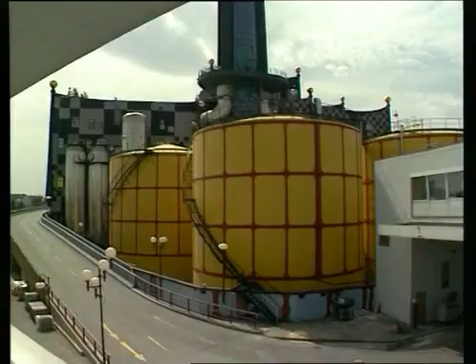Spittelau is, in fact, 2 plants in one, a waste incineration plant and a district heating plant. The plant is able to supply the Austrian network with altogether 460 megawatt of heat.

In the 2 waste incineration plants, Spittelau and Flötzersteig, more than 450,000 tons of household refuse are disposed of thermally for the purposes of environment protection. This is equivalent to 54% of all the waste of the city of Vienna.

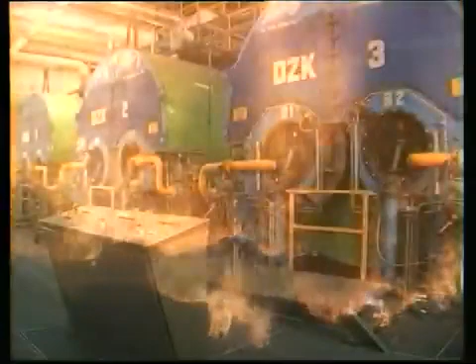About 60% thereof is burnt in Spittelau. During incineration, the waste delivers 60 megawatt of heat and, in addition, sufficient power to meet the needs of the plant itself. In the district heating plant using natural gas and special fuel oil, 400 megawatt of heat can be produced.

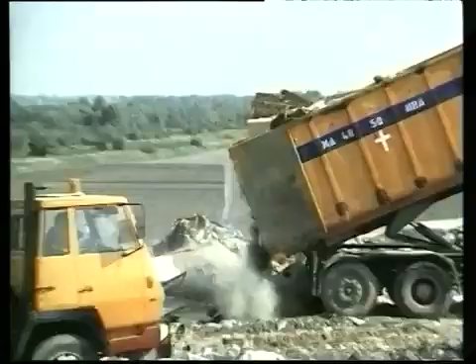The disposal of a city's waste is a problem. Space available in existing dumps is becoming scarce. If waste is dumped in untreated form, there is a risk of dangerous gases developing and of polluting underground water.

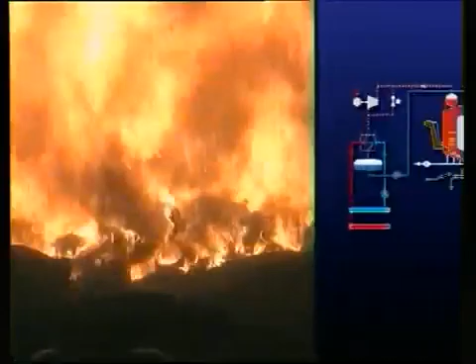Austria's new waste disposal law decrees that in future only a small proportion of refuse may be dumped untreated. One solution is controlled, precisely managed incineration in combination with optimum flue-gas cleaning, following which only few and chemically inert residues remain over.

The pressure is heavy. Up to 250 refuse collection vehicles have to be handled every day in the Spittelau plant. They arrive with up to 1,200 tons of household refuse. At 8 dumping points, these lorries empty the refuse into the storage pit.

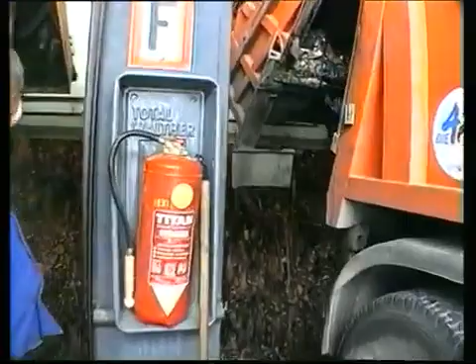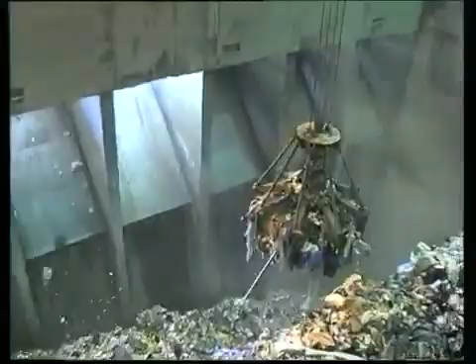The storage pit has a capacity of 7,000 cubic meters. It is the storage base for the Spittelau plant because the furnaces are in operation around the clock. Waste incineration is carried out in 3-shift operation.

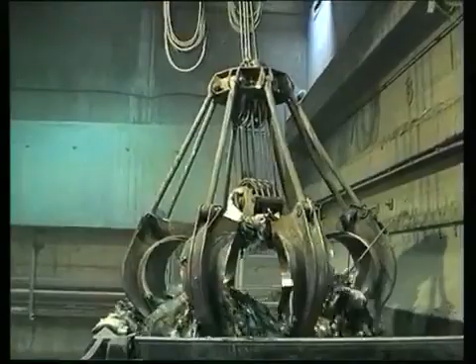2 gantry cranes, each fitted with a 4 cubic meter polyp grabber, cope with the piling work in the bin and feed the 2 furnaces. The refuse lands on hydraulic distributors, which spread it out on 2-run reverse-acting grates.

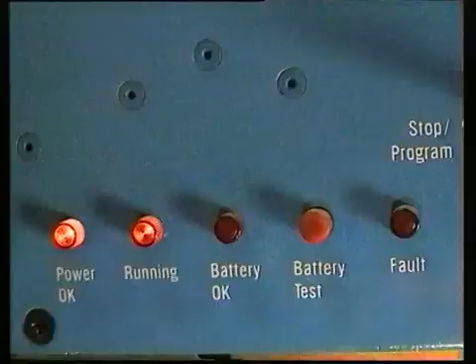Regarding incineration, all the technical possibilities are utilized to achieve a high temperature. This ensures that the amount of dangerous residue is kept to a minimum. The incineration is precision controlled by a power output calculator.

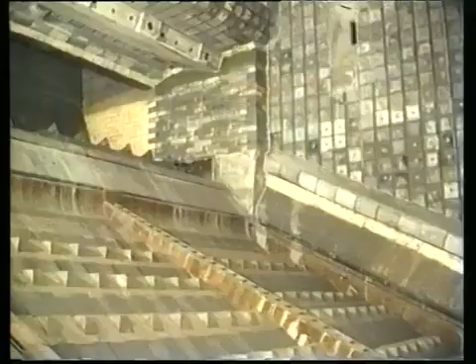Through slits in the grate cover, 80,000 cubic meters of preheated air per hour are introduced. In addition, secondary air is force-blown by means of nozzles onto the front and back of the undergrate chamber. This means that the temperature in the combustion chamber above the grate goes up to 1,150 degrees Celsius.

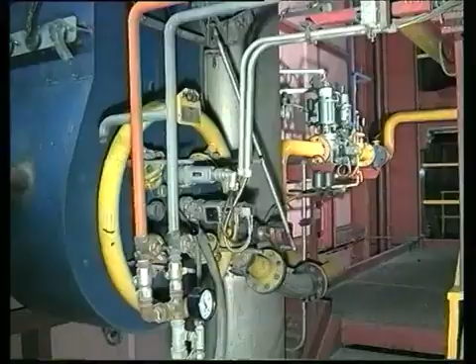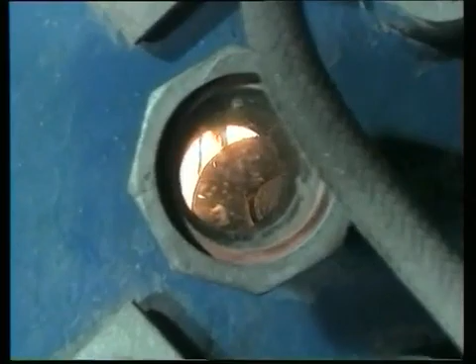During the unstable start-up and rundown phases, 2 gas burners guarantee a temperature of at least 800 degrees Celsius. The flue gases thus burn better to extinction, and the exhaust air remains clean.

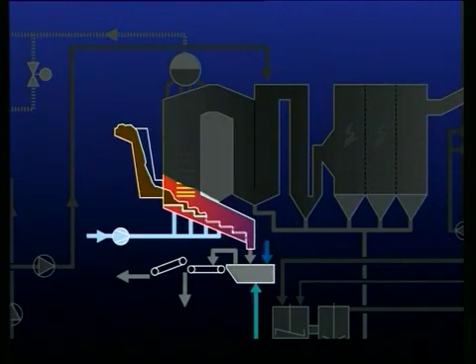Technical provision is also made in the Spittelau plant to ensure complete combustion of waste. A cyclical motion of every second grate rung slowly revolves the burning waste.

After incineration is completed, not much is left of the enormous piles of waste. Slag and ash only amount to 10% of the original volume.

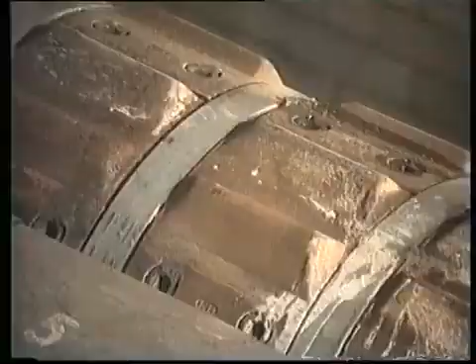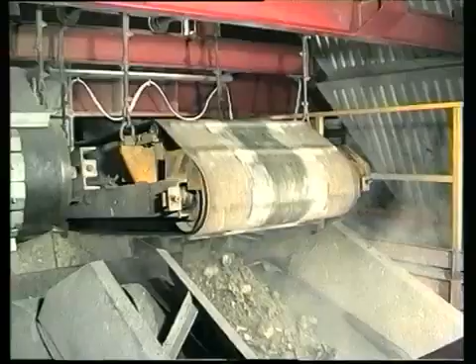At the end of the grate, a roller propels the burnt-out slag into the water-filled extractor. On its way to the slag pit, a magnetic extractor separates all scrap from the slag. This is then recycled.

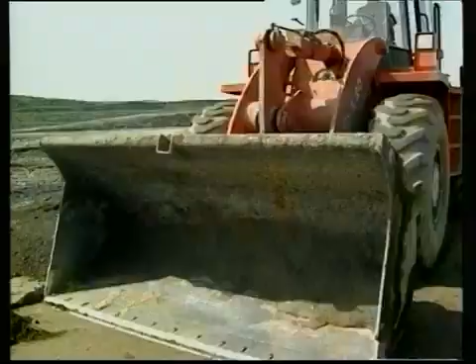Slag and ashes no longer react chemically and therefore represent no danger to the underground water or atmosphere when dumped. They are bonded with water and cement into slag concrete and used for the construction of a concrete ring at the Rautenweg dump. This makes valuable savings in dumping volumes.

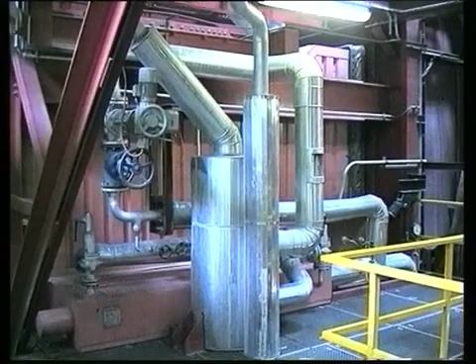The heat from waste incineration, which takes place in 2 parallel lines, is used to best advantage by steam boilers. The flue gases emerge from the combustion chamber at a temperature of 800 degrees Celsius. They flow through the second boiler pass with its contact evaporator, and in the third pass they warm the feed water up to boiler temperature.

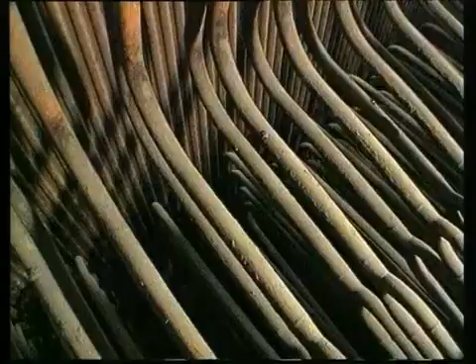The 2 boilers work on the natural circulation principle and have a heatable area of 2,400 square meters. The natural circulation steam generator consists of a cylinder, the descending and ascending tubes, and the contact heating surfaces. Together, the 2 waste boilers produce 90 tons of steam per hour, up to a pressure of 34 bar.

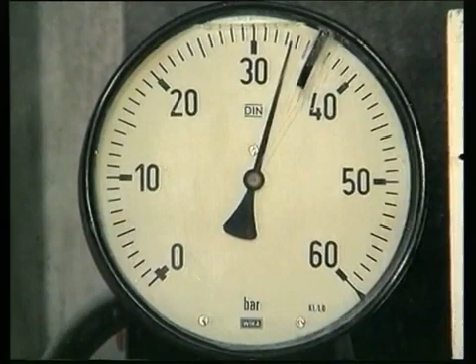This pressure must be reduced before the water can be heated for the district heating network. It is utilized through a back pressure turbine to produce current. The attached generator can produce 6 megawatt of current. It supplies the power needs of the waste incineration plant and also feeds current into the public network.

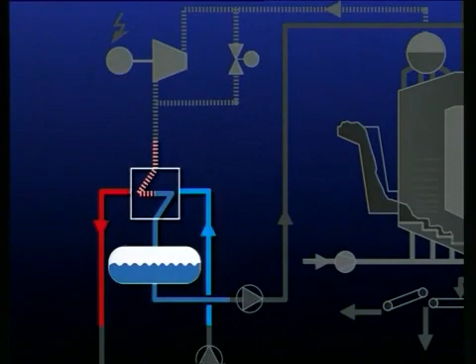After leaving the turbine, the steam is condensed in a heat exchanger group. This heats up the return water from the district heating network from 70 degrees to 155 degrees Celsius. The heat output is 60 megawatt.

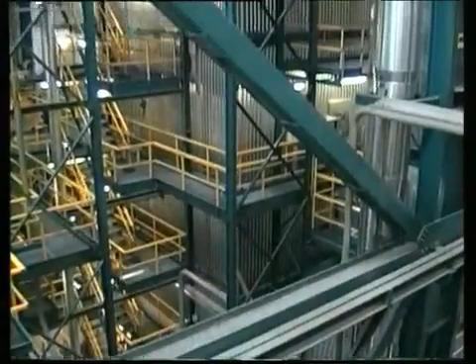In the district heating plant, in case of high heat demand, the output can be raised to 400 megawatt. For this purpose, there are 2 hot water radiation boilers, each rated at 170 megawatt, and 3 three-pass boilers, each rated at 20 megawatt.

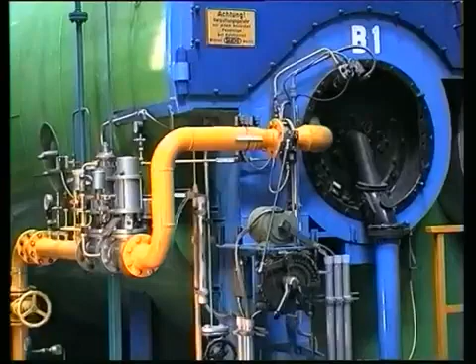The Spittelau district heating plant is located in a residential district of Vienna. That represents a challenge to environmental technology, but also to external appearances, because Spittelau is part of the municipal living space. The Spittelau district heating plant is a fantastic demonstration of a successful symbiosis of art and technology.

The painter Friedensreich Hundertwasser, a fantastic realist, undertook the outward enhancement. The result? A strictly functional building has been transformed into a unique work of art, a new Vienna landmark.

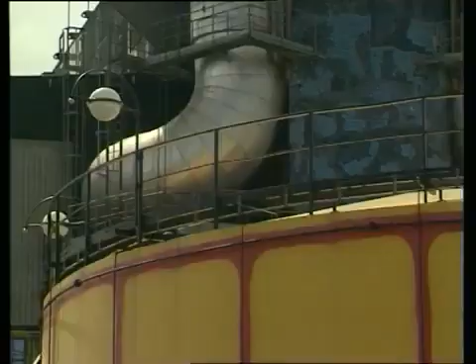Hundertwasser is a dedicated campaigner for nature and environment protection. He was easily convinced of the desirability and absolute necessity of waste incineration. His facade design demonstrates his view of the dichotomy between technology and nature, a geometric chessboard opposed to natural, flowing, irregular forms.

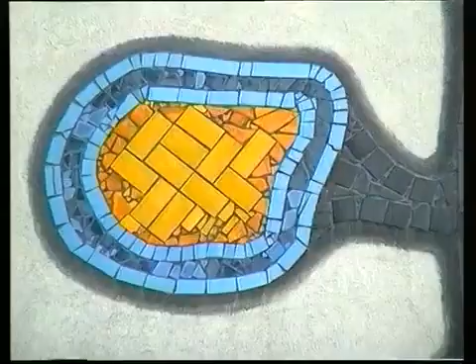The whole opus is crowned with a golden ball which houses an emission measuring station. Precise observations are made here of everything that emerges from the chimney. The golden ball symbolizes the importance attached by Fernwärme Wien to pure air.

Measurements are taken of dust, sulfur dioxide, carbon monoxide, nitrogen oxide, hydrochloric acid, hydrocarbons, and also of heavy metals. By means of a direct computer link, Municipal Department Number 22 monitors compliance with strict threshold values. The Spittelau plant operates at an even higher degree of environmental efficiency than foreseen by law.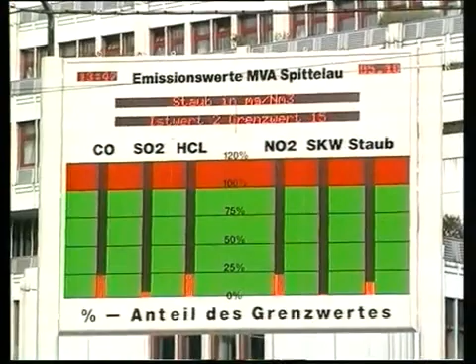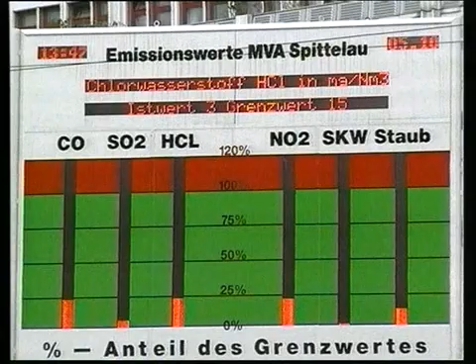Since 1994, the Viennese can check this for themselves. A display panel on the Lichtenwerderplatz shows the relative values in percentages. The permitted levels are generally never reached. The Spittelau has an outstanding international reputation concerning air purifying and is regarded as exemplary environmental construction.

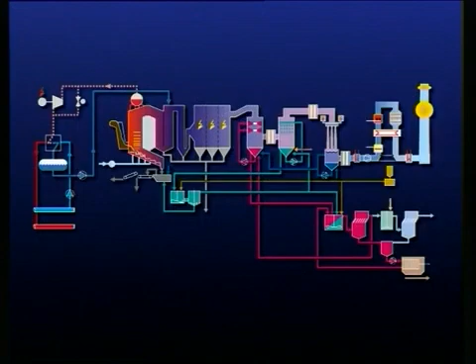The expenditure involved in achieving such extremely low emission levels is high. In the Spittelau plant, electrofilters, flue-gas washers, and a denox plant have all been installed.

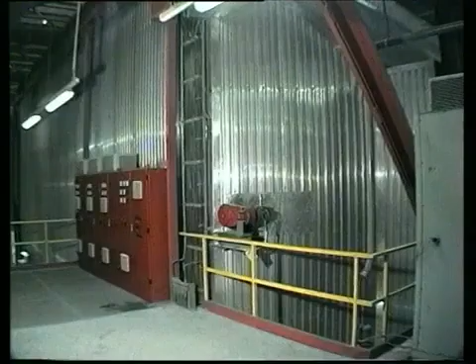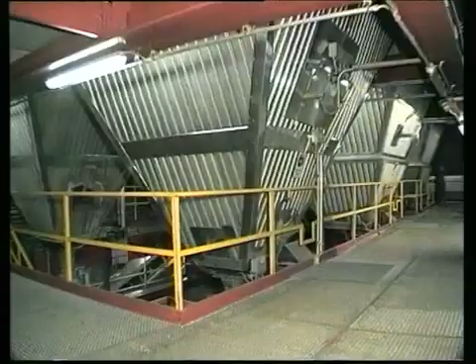To start with, the flue gases must pass through electrofilters. These reduce dust from the extracted air from 5,000 to 5 milligrams per normal cubic meter, that is, to 1,000th of the original level. For new plants, a maximum level of 15 milligrams per normal cubic meter is specified. The Spittelau does not even emit 1/3 of this amount.

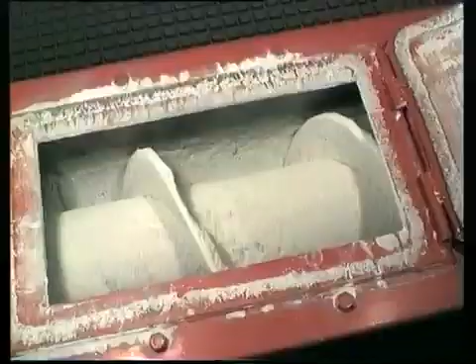The extracted dust is transported by screw conveyors to an intermediate silo, then filled into a silo transporter and sent for final conditioning to the Rautenweg dump.

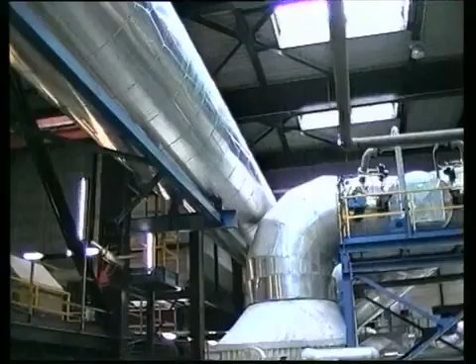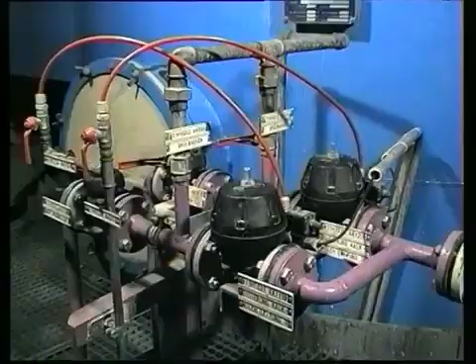The dust-less gases are fed into a flue gas washing plant. Spraying with fresh water reduces their temperature to 60 degrees Celsius. Subsequently, they pass through the first washing tower. The pH value of the wash water is stabilized by the addition of lime slurry at a value of 1.

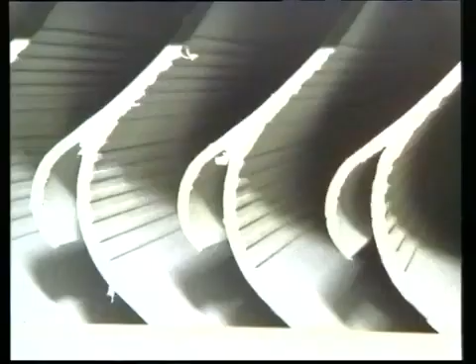The extraction of hydrochloric and hydrofluoric acid, as well as of dust particles and heavy metals, is undertaken in sealed, double-hollow conical water shields. In order to prevent the transfer of calcium ions from the first to the second scrubber, a mist eliminator has been installed between the two scrubbers. It contains interspersed lamellas on which the water drops which have been carried along will impact and be carried back to the first scrubber.

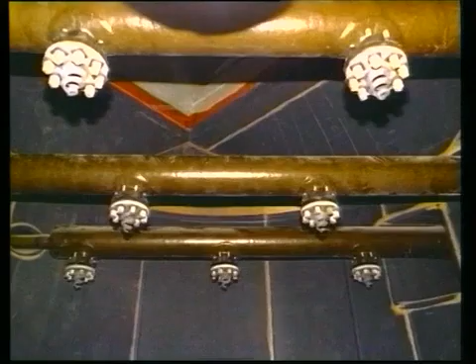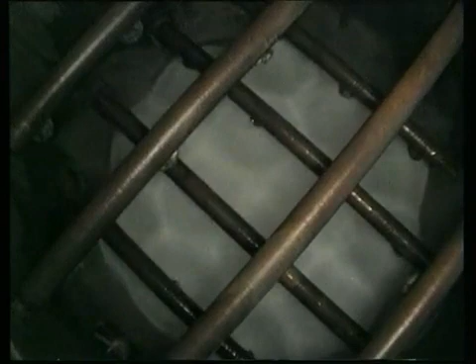Sulfur dioxide is separated in the second scrubber. It is designed as a counter-flow scrubber. The pH value is stabilized at around 7 with the soda lye and flowback water from the MR stage. The quantity in circulation amounts to approximately 900 cubic meters per hour.

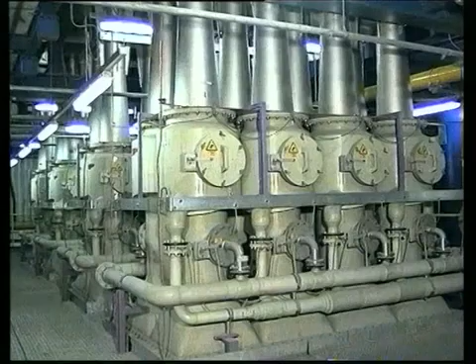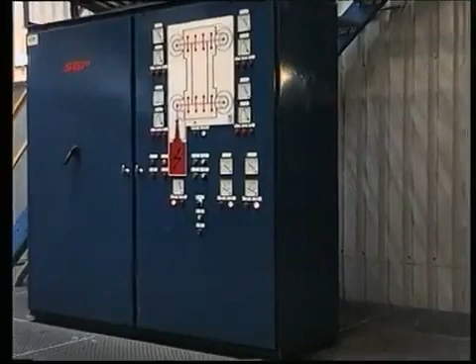After a further mist eliminator, the flue gases are fed into the electrodynamic venturi and then expanded in the diffuser. The fine dust particles form cores for small droplets which are separated in high-density water shields. This measure is furthered by placing the middle electrodes in the Venturi nozzles under high tension.

After passing through a further mist eliminator, the flue gas is warmed in a dryer before it reaches the induced draft fan.

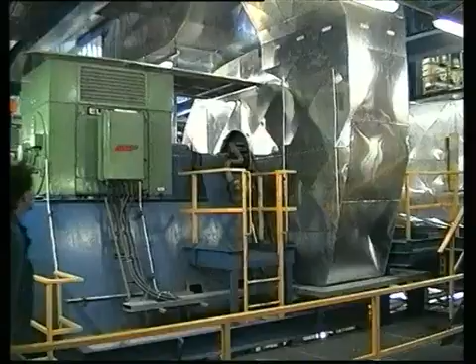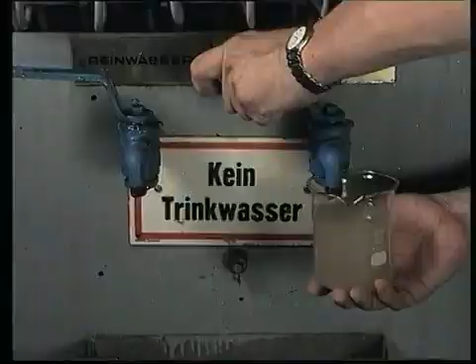Large quantities of water are required for flue gas washing. They are taken from the Danube Canal. After the flue gas cleaning, the water is cleaned and after cooling and a final check, is fed back into the Danube Canal.

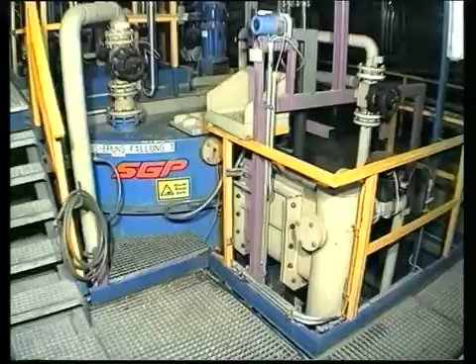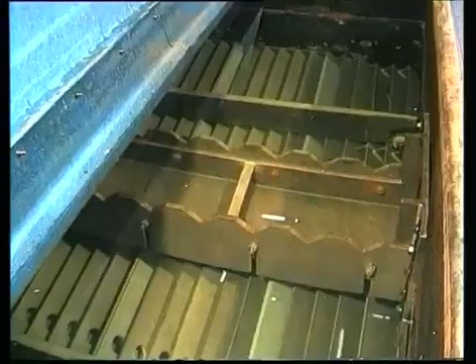The wash water of flue gas scrubber number 1 contains chlorides, fluorides and heavy metals. It first passes through a heavy metal sink. The resulting heavy metal hydroxides are bonded using iron 3 chloride and a polyelectrolyte and turned into flakes. Mercury and cadmium need an additional special precipitant. The separation is achieved in a lamella-type baffle plate thickener.

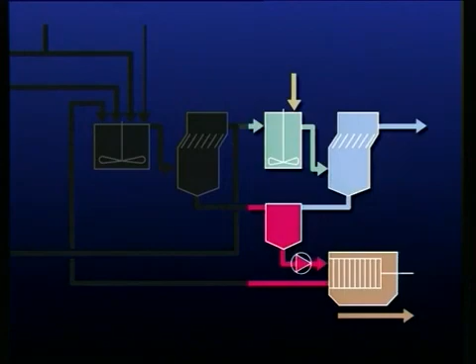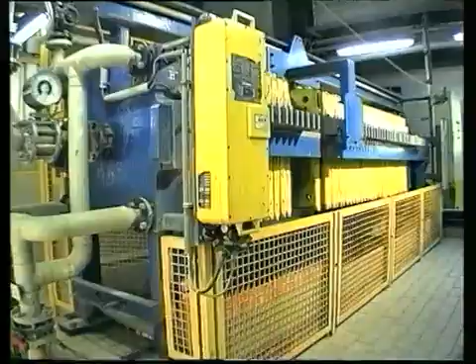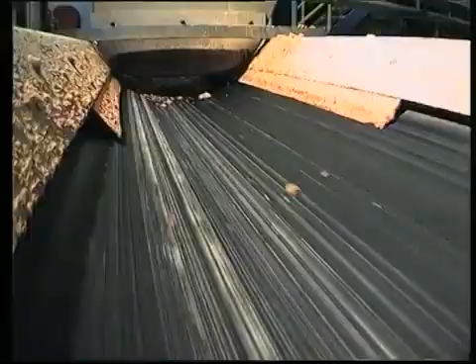In the second precipitation stage, the fluorides are likewise sedimented in a lamella-type baffle plate thickener and passed on with the hydroxide sludge from the first precipitation stage to the filter presses. The dehydrated thin sludge forms the filter cake. So far, no way has been found of further processing it economically. This unusable remainder, however, only constitutes 1/1000th of the original waste quantity. It is filled into big bags and used to pack galleries in the abandoned Heilbronn salt mine.

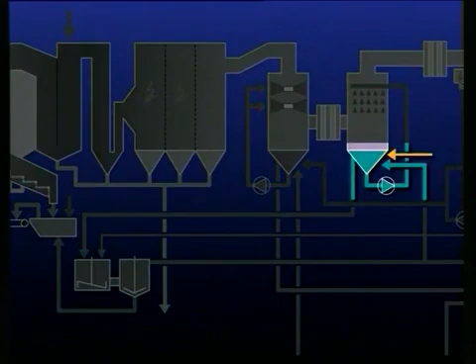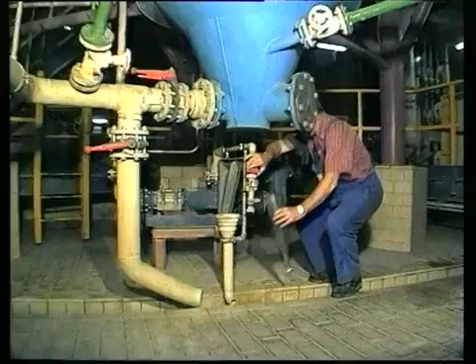The wash water from the second scrubber contains sodium sulfate. It is put into the MR reactor. By adding lime slurry, the pH value is raised from 7 to 10.5. Reprecipitation takes place with the formation of gypsum and the release of soda lye, which can be employed in the cycle of the second scrubber. The gypsum is sedimented in the attached clarifier and pumped to the slag extractors of the refuse boiler.

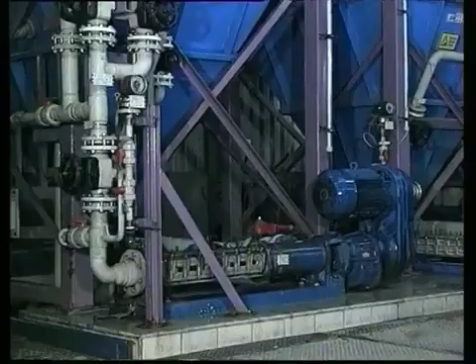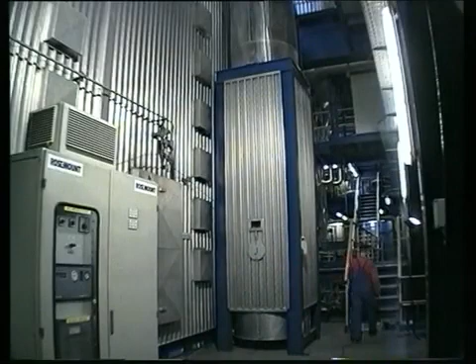For the last stage of the cleaning process, the flue gas from both boiler units is passed through the denox plant. At this point, the nitric oxide is cracked and the residual dioxin destroyed. The Spittelau plant uses Europe's first catalytic converter, working on the principle of selective catalytic reduction, SCR for short, following waste incineration.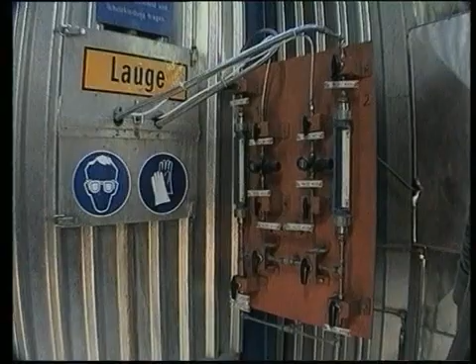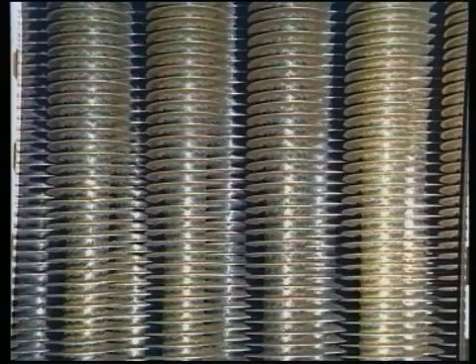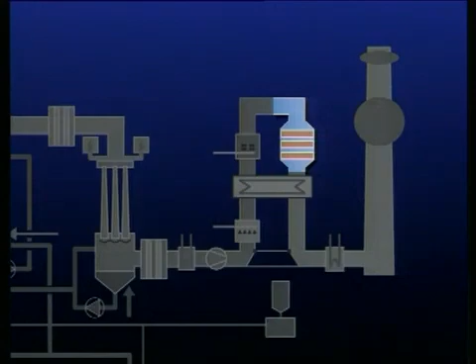While entering the denox plant, the flue gas is sprayed with vaporized ammoniacal liquor. A heat duct, which withdraws heat from the flue gas after the catalytic converter, raises the temperature in the crude gas to around 220 degrees Celsius, and a natural gas duct burner pushes it up further to 280 degrees Celsius. When nitric oxide and ammonia react at this temperature, nitrogen and water vapor are formed - that is, natural constituents of the atmosphere. The catalytic converter has the task of releasing this reaction.

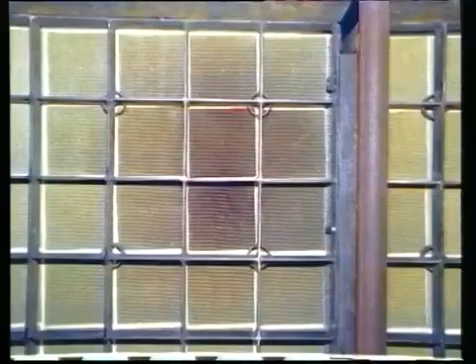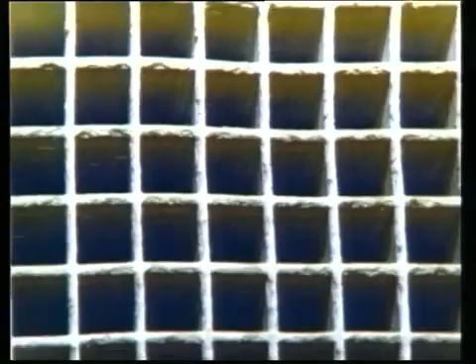The surface of the catalytic converter must be as large as possible in order that the nitric oxide can react for long enough to split up and the dioxin be destroyed. It consists of porous, ceramic, titanium, vanadium, tungsten briquettes. In its 3,024 elements, there is a honeycomb of reaction surfaces available measuring 46,000 square meters. Microscopically fine pores enlarge this to 2.7 billion square meters, equivalent to 6.5 times the area of the whole city of Vienna.

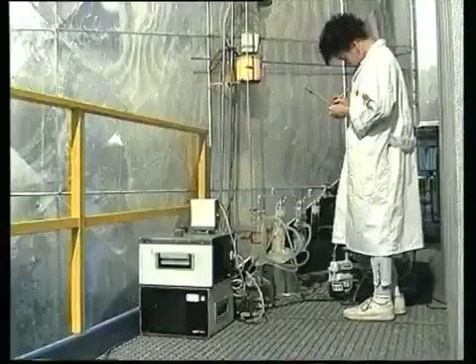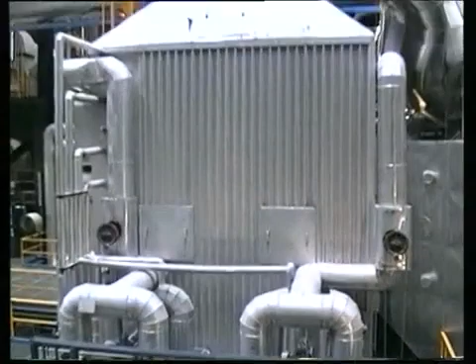The dioxin discharge from Spittelau is reduced by the catalytic converter by 99% and now stands at a dioxin equivalent of between 0.02 and 0.04 nanograms per normal cubic meter. The legally permissible limit is 0.1 nanogram per normal cubic meter. After passing through the catalytic converter, the flue gas is cooled in the heat duct and in an attached heat exchanger down to about 115 degrees Celsius. The gas emerges from the chimney at a height of 126 meters.

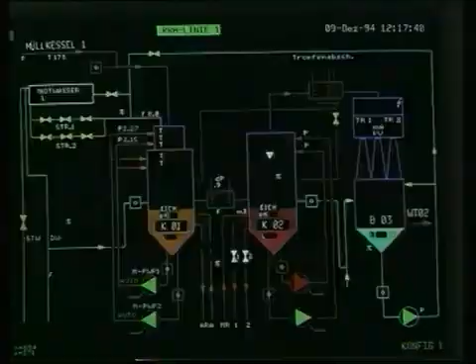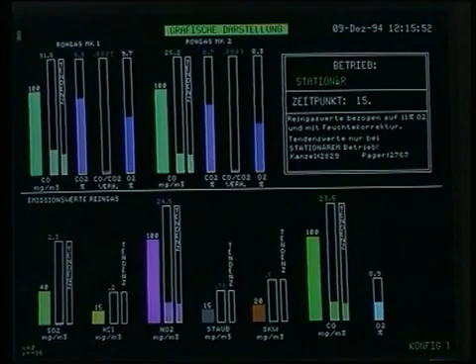The most modern handling and computer technology ensures smooth running of the whole Spittelau plant's operation. Control is exercised from a central command post. Processing computers here handle 9,000 items of incoming information every second and display the results continuously on control screens. The combustion level, the washing plants, the wastewater treatment, the denox plant, the boilers and many other points can be controlled and managed from the central command post. The measured values of emission are also continuously displayed and, together with many other data, stored for future reference.

From a second observation point, the network of the Fernwärme Wien is continuously monitored, controlled and adjusted. It is Austria's largest district heating network.

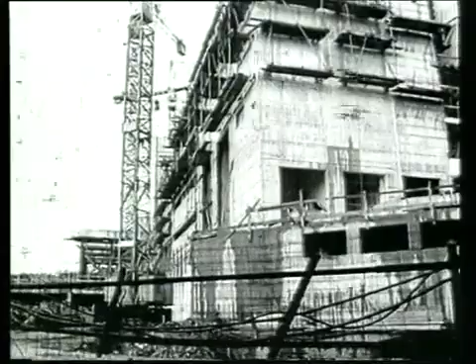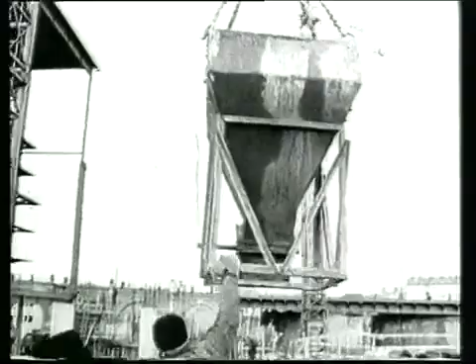There was a modest beginning. Fernwärme Wien was founded in 1969. It then had a double task: incinerating waste and providing district heating. Several existing heating plants and house units producing district heating were incorporated into the new company. In addition to supplying the General Hospital, Fernwärme Wien GmbH undertook the task of building up the Vienna district heating network.

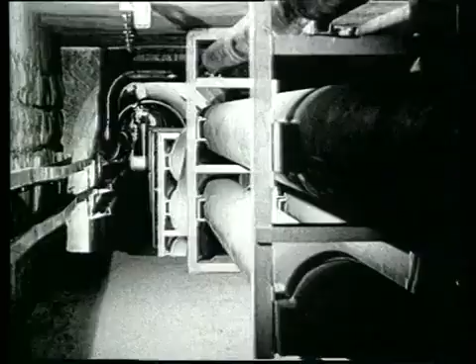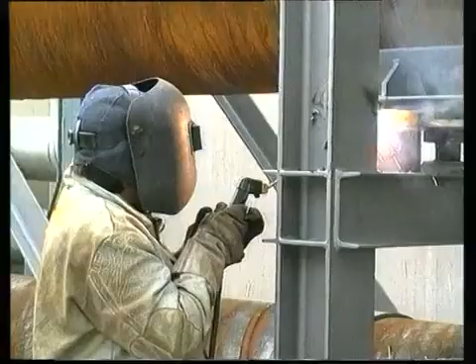Since then, the district heating network has grown to 700 kilometers and meets about 1/4 of the annual requirements for space heating in the federal capital. The heat is supplied by the two household waste incineration plants Spittelau and Flötzersteig, the dangerous waste incineration plant Simmering, and the thermal power compounds of Simmering Power Plant, of the Schwechat Refinery, and of the Leopoldau Gas Steam Turbine Power Plant.

And whenever these plants are unable to meet demand, peak performance boilers at the Arsenal, Kagran, Süd, and finally Spittelau are started up. Only 4% of the heat supplied by Fernwärme Wien is produced from gas and oil. Waste incineration and thermal power compounds save almost 300,000 tons of fuel oil every year in Vienna. By economizing on primary energy sources, 900,000 tons of carbon dioxide emissions are averted and the Vienna air situation greatly relieved.

However, that is not sufficient. 1/4 of all Vienna households still heat with fossil fuels and thereby cause 96% of total air pollution through space heating. Increased use of district heating could ease this situation and reduce the size of the refuse piles.